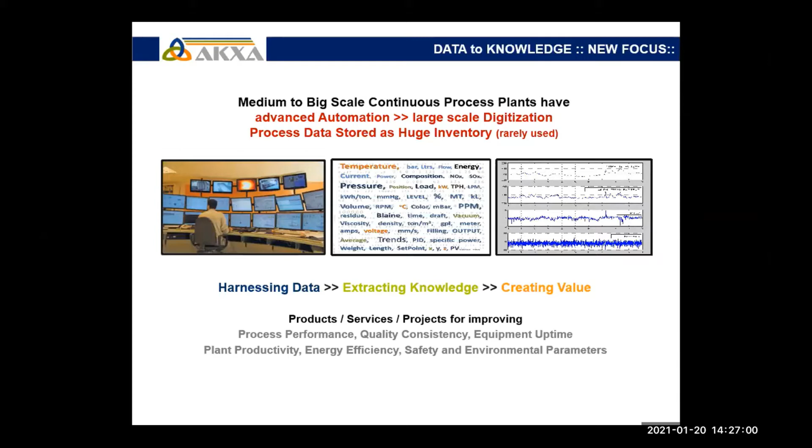We can still achieve higher productivity and energy efficiency in existing setups. That is what we are searching for, because we believe there are fluctuations and variations in every plant and every operation, because the plant doesn't stay exactly at the point where you want, right?

So you have productivities or plant key performance indicators. One day you achieve, let's say, 98% of the target, one day you achieve 95, one day you achieve 100. From a production angle, the productivity is varying - that means the same setup can give you more sometimes, and sometimes it gives you less. It consumes more specific power or heat, or it consumes less specific power. So there are variations in existing equipment on a day-to-day basis, maybe. So what is contributing to these variations? Can we pinpoint those?

Is where we come into picture. So if there are large variations, you get less margin for improvement. So we help you to identify the root causes of these higher fluctuations, and ultimately help you to reduce this, build the solution to reduce this as well.

So we are not just the observers at the plant. We will identify the gaps. We will help and sit with your team to optimize this as part of the service. And to sustain this at a lower level, we have products which can monitor online all these variations. And whenever there are deviations, we can pinpoint where is the root cause.

So ultimately, our focus or value addition proposal is in understanding fluctuations as energy efficiency limiting factors. And if we reduce these fluctuations, we can reduce the variance, ultimately optimize the plant day averages in the setup. So is it worth it?

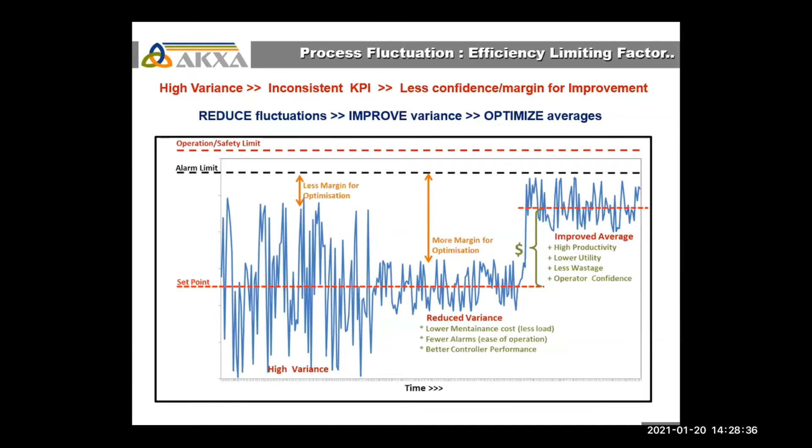When we did a small checkup, and when we were working with bigger plants, we were observing that in a stabilized plant, in a well-commissioned plant, after the OEM leaves, there are a lot of changes which happen in your process. Raw material quality shifts. You are buying from different sources. Nowadays, you are forced to use additives from different other industrial wastes. So you don't have control over them.

So they introduce a lot of fluctuations, and your process starts shifting from the best normal solutions, or you are running the plant at higher capacities than the design, 10% more already. Capacities have been hit, but the efficiencies are also getting affected during that time. So is it worth understanding the contribution of these kind of fluctuations? Are they really affecting, and is it worth chasing them and solving them so that we can save something out of the existing plant? And we saw very interesting numbers.

In many plants, we have calciners or furnaces or heat related equipment where fuel is being fired, and typically monitor the temperature, which is basically used to control the fuel or the excess oxygen at the exit. If the temperature is varying 1%, we are talking about variation, not in terms of whether the temperature set point is correct or wrong. That is your expertise. You will keep the set point, what is required. But whether it is maintained around what is required is what we are checking. There could be a lot of reasons for that.

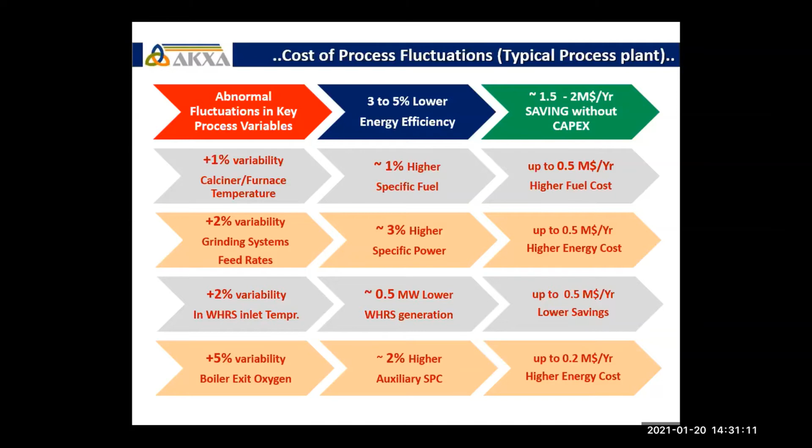We have developed various means and ways and products which can automatically take your plant data, analyze it, and give you insights. Where are these coming from? So we have introduced a thing called fluctuation audit. So like your safety audit, energy audit, environmental audit, and financial audit, you can conduct a fluctuation audit of your plant, typically a 3 to 4 day activity. We come out with gaps at all these layers.

How your plant KPIs are varying, 5 to 10 variables. Typically, you want to see day-to-day variations. And you generally monitor this. You know this is the final impact. But what is causing that is what we will study. So we go a layer down. We collect minute scale data from your parameters, lab data, other things, generally 25 to 100 variables.

And we go one more layer down from your control systems automation area. Every second, data is collected for 24 hours of around 100 to 500 variables, depending on the plant and section. And then another layer below, we go to the panels and we record the performance of weigh feeders, fans, VFD drives, which is a very fast-changing system in the field, because we believe the variations happening at that scale are ultimately impacting your performance on the top scale.

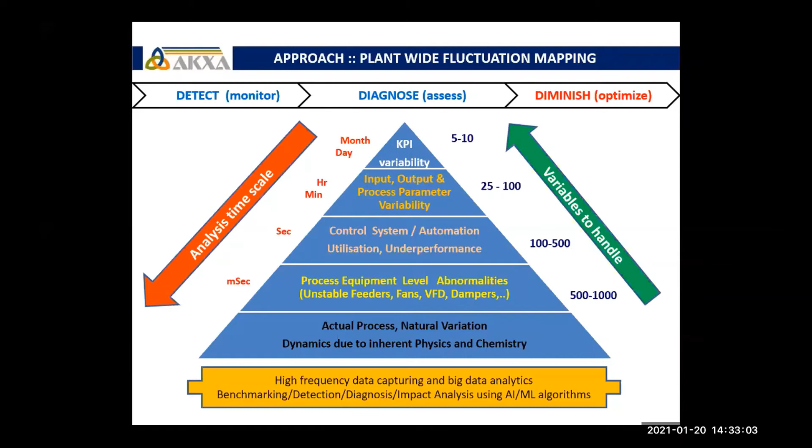So this is a unique approach we have taken, and it's not easy to do it manually. So we have used high-end data analytics algorithms in our software, and it can handle thousands of variables at different time scales in different sections. And on top of that, we have built in the process knowledge with our expertise in different fields. So this is how we take high-frequency data as our input. We detect the abnormality, we give you root causes of these fluctuations, and also help you to diminish or optimize the fluctuations in the plant.

So we have a series of products in this entire offering. In many plants, we have seen data capturing itself is a problem. Many places do not have a good, full-fledged DCS. So we have built two different tools called Akxa graphIT. OPC is a common tool available in the market, but our unique offerings are data capturing offerings, which is graphIT, which can just take the image trend. If you cannot export the data to Excel, you can take a picture of the graph and it will convert it to an Excel file using a digitization algorithm built inside.

We have some techniques for many of your plants. There are bagging plants or packing plants where in 8 or 9 seconds you are filling a bag, but there is a lot of variation in the bag weights. Typically, we have seen this in cement plants and fertilizer plants, where granules or powder are filled in 50 kg bags. Typically 200 to 400 grams is the variation coming in that. And if we can save even 10 grams, 30 grams out of this, in the long run it saves millions. In such cases, data capturing is very difficult.

So we have built a device called digitEYES, which is a mountable video camera which records the bag filling cycles, 10 to 15 bags, and it's a high-resolution camera. It can convert it to a trend and then helps us analyze where the situation is coming from, whether it's fast filling or slow filling. So we have these kinds of tools, which can be used without connecting to your existing setups. Maybe you have legacy systems, old systems you don't want to touch, or the OEM has not given you an upgraded version, so you don't want to install any software. So this video tool helps you.

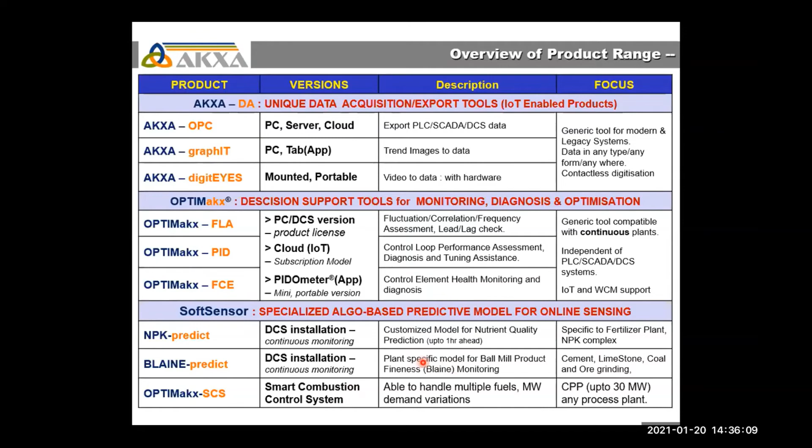So we do a thorough assessment in the plant, right from benchmarking, diagnosis, analysis, and assessment, and provide services to sustain the solutions for 6 months, 1 year, whatever is mutually beneficial for both parties. So this is the approach we take. It's a complete offering. We also just do diagnosis. We just do audits also to give you benchmarks. If you can resolve all the issues, good. If you want us to optimize, we provide the solutions around that.

We have subscription tools which can be used. You need not buy the software tools directly. You can use the subscription. If you like it, then shift over to the perpetual license. So we have all the options of business models, whichever is suitable to your plants. We can work around that and give you the best solutions.

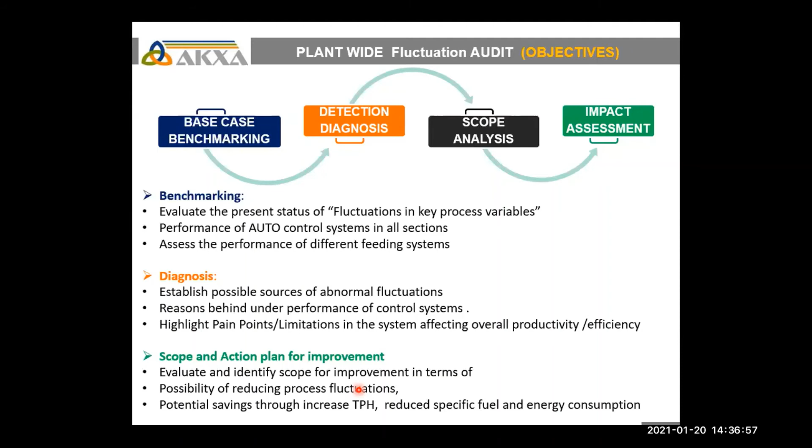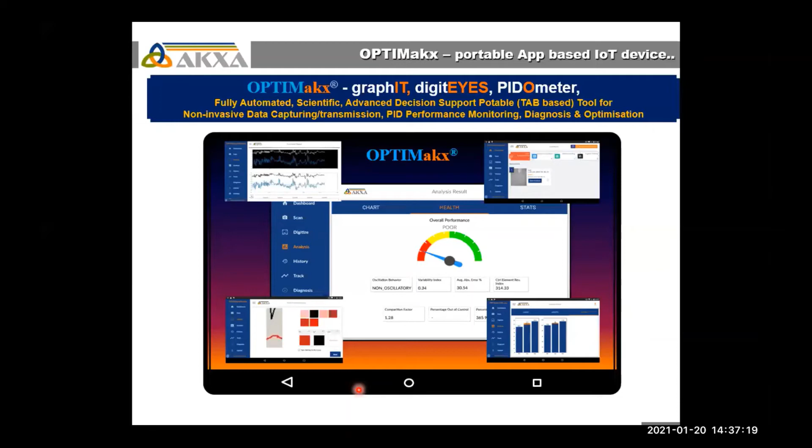Our strengths are, we would like to say, we have multiple process expertise. We come from a chemical engineering background, so we see the problems as a process engineer rather than just as an instrumentation engineer or an electrical engineer would see it, because the problems are there in different ways.

We are independent of equipment suppliers. We have worked on multiple equipments in process plants and utilities. We have worked on different capacities. We have worked with the DCS systems of all the famous OEMs you can name. We can take data out of any of these. We can write logic in any of these DCS systems. So that is our strength.

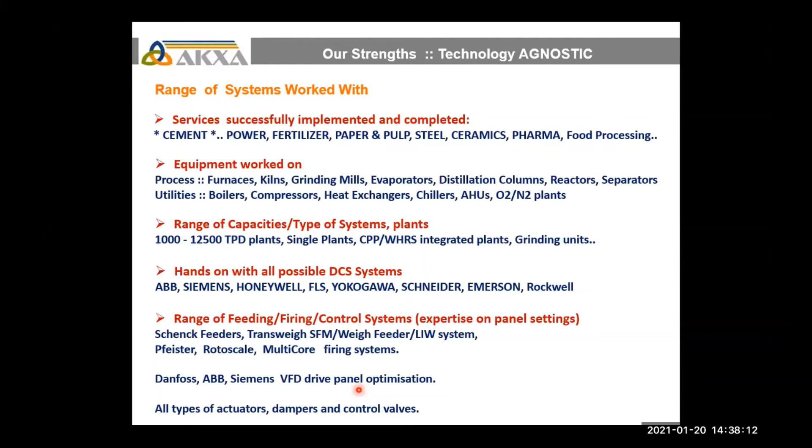We bring complete solutions. Nowadays, people are putting different systems from different OEMs, but when they integrate, there are a lot of interaction issues. So this is where we pitch in. We have one-stop products and solutions for many of your typical problems in process plants, and all this without necessarily having to put capex, purely from existing resources, what can be done.

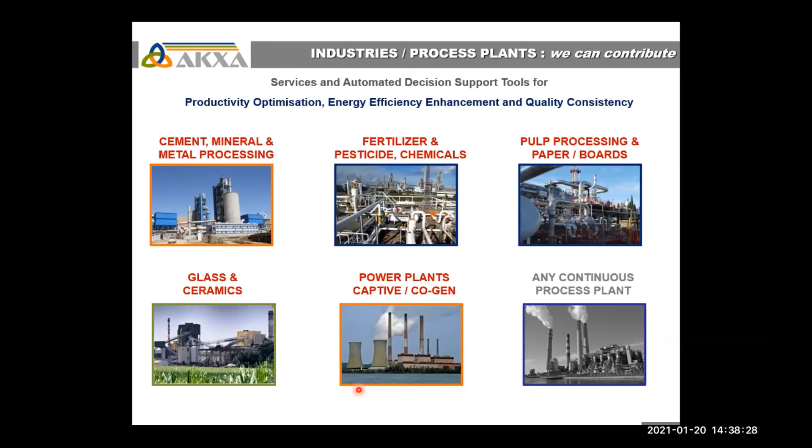We have worked in these industries, namely, as I mentioned, cement, fertilizer, paper and pulp, glass, ceramic, power, and other plants. In the last 3 years, around 60 plus clients in India and clients abroad in Europe, US, Africa, as well as in South America and East Asia. Also, we are now exploring options.

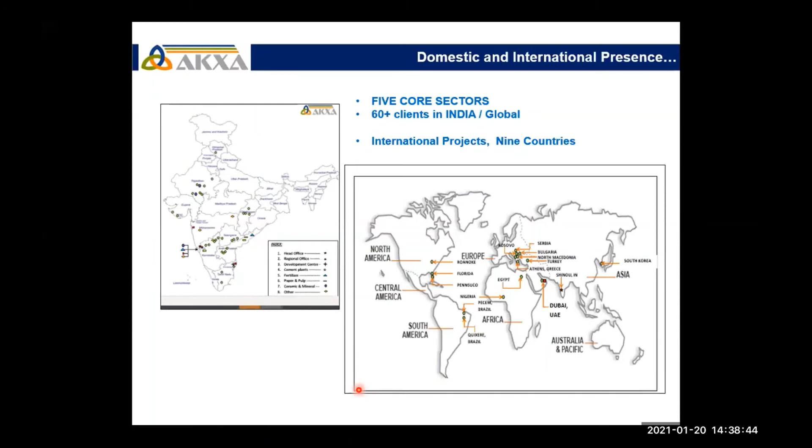So just give me the last 5 to 10 minutes to quickly tell you where we have contributed. If anyone wants details, we can share individual case studies. We have worked in different areas of different plants. If you group them by sector, or equipment wise, we have worked in water treatment plants to control ozone and pH variation in a pharma plant, which has led to savings of reagents and other things.

We have worked in HVAC systems for improving the temperature and relative humidity variations in typical large scale setups. This can be extended to buildings and other things. Though we don't have direct experience with buildings, with HVAC systems we have pretty much experience in understanding their behavior given different disturbances in the plant.

We have worked with power plant boilers. We have worked on oxygen and nitrogen plants. We have worked on compressors. These are mainly utilities where we have worked, and all big plant process control systems where large savings or large impact is observed. Okay.

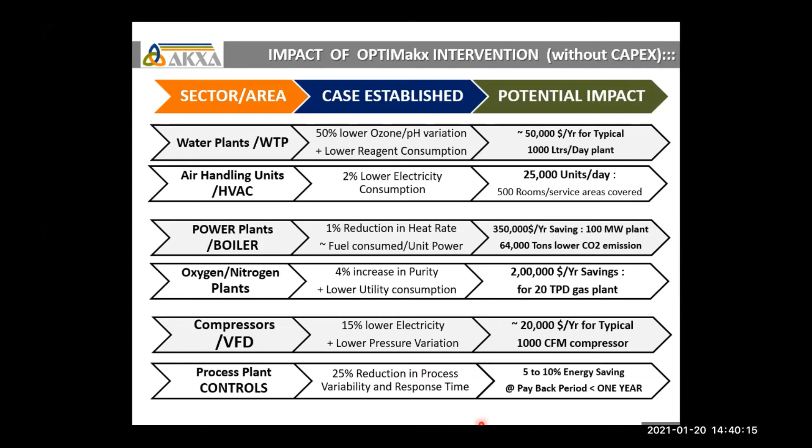We optimized the main controller firing system. Then we optimized the disturbances coming from other areas like the kiln hood pressure variation. Then we optimized the cooler, which is also supplying the air to the pyro section. Then finally we stabilized the air flows in the cooler. Ultimately, it has given lower variation in the calciner temperature, and over 6 months of observation, consistency and sustainability without having to put in new equipment, on average 1% fuel saving.

It may not appear big, but over 6 months, it's almost 6.5 tons of coal saving every regular day. And on average, it's almost 200,000 US dollars savings to this plant in 1 year, and up to 5% power saving in the pyro section, which comes to around 1200 units per day saving.

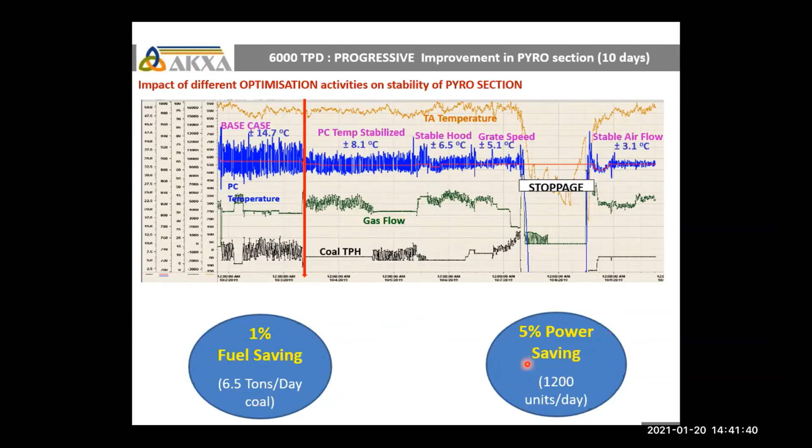Especially when alternate fuels are used. We have very interesting new logics which are implemented in the existing DCS, which can lead to consistency and stability in the operation, increase production, and increase the megawatt generation. So typically margins are available in the turbines. We can tell you, yes, we can use those margins and help you to enhance the production.

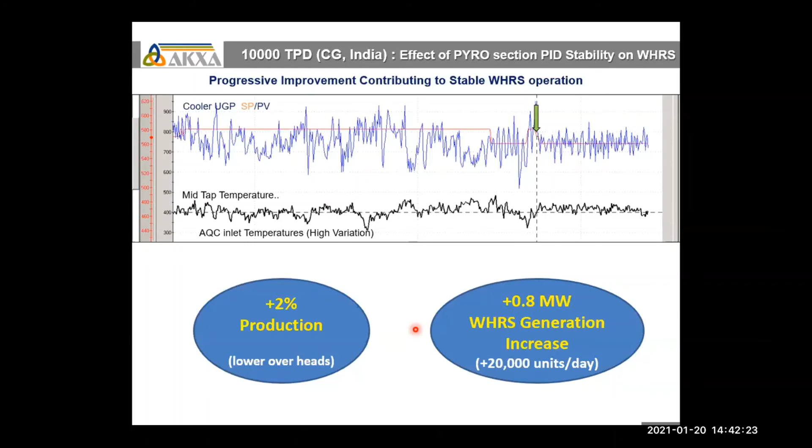This is about the quality consistency idea. In a fertilizer plant, they were facing problems in NPK variation. We worked in 2-3 areas. We found out the root cause. We gave the solutions in terms of stabilizing their sampling intervals and stabilizing their sampling methods. We also optimized the input flow. And then finally, we implemented one tool called nutrient prediction, which used to give them the feedback very quickly. Based on that, the operator would be taking action. So ultimately, 15 to 20% rejection on different variation conditions, along with excess nutrient, is reduced. Those levels are reduced.

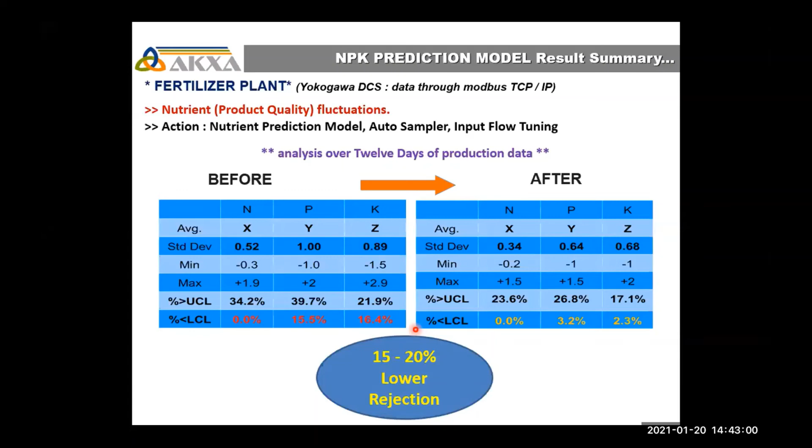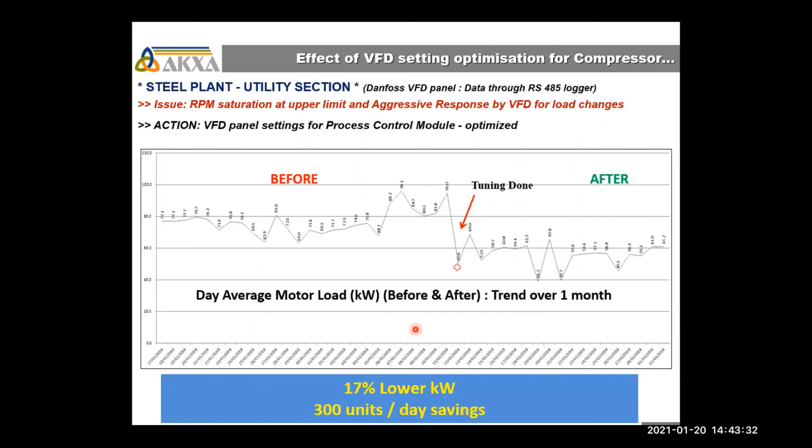We worked in a typical steel foundry. We worked on a variable speed compressor with variable load coming on it. The same VFD drive, Danfoss VFD panel settings, we optimized for the running conditions of the plant based on the shift differences and load conditions. And it led to 17% lower kilowatt and around 300 units per day saving. Typically we take the data from the model, use it and tell them what is wrong, what settings they have to change. These are pure service models. And to sustain this, we have the tools available.

This is an example from a pharma coating section where they were having issues with a delayed startup cycle. 49 minutes was taken to reach the set point where coating would start. We reduced that to 8.5 minutes by understanding what was causing this delay. And finally, 18% lower startup heat, which is indirectly steam consumption saving, and up to 9% productivity increase because we reduced the batch to batch gap. They can immediately empty and start it, especially when power trips are there. You can restart it very quickly. So productivity, which is a huge contribution in the pharma industry.

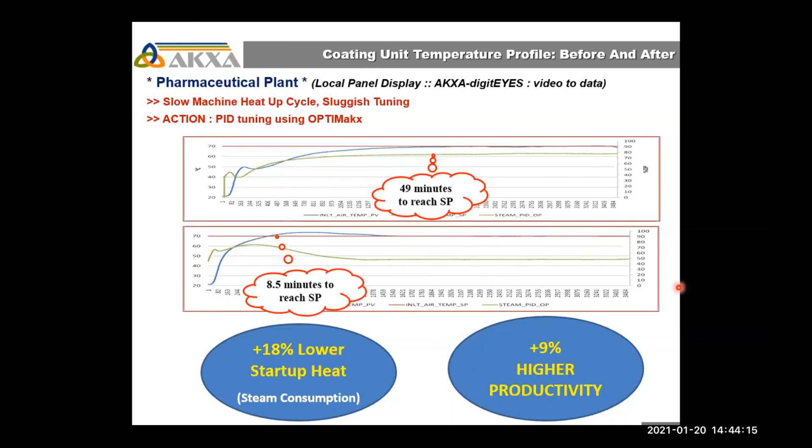This is another plant in the paper pulp industry and in the ceramic industry where oxygen plant purity was not coming. This was a 25 year old plant. The supplier stopped the services for this model. We took it up. We optimized the pressure swing adsorption ratios, pressures and valve openings. Purity was not coming up to the mark, so they were adding additional liquid oxygen from outside to make up the purity. That was additional utility usage. When we stabilized the plant, the purity improved by 3% on average, with 80% reduction in liquid oxygen, nearly 40,000 rupees per day saving, without having to install anything, just pure data analysis using our algorithms.

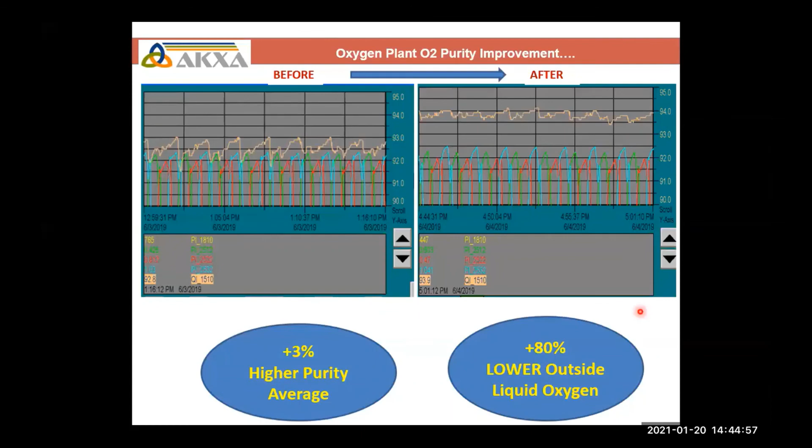Water treatment plants: pH control improvement, ozone regulation improvement. These are regulatory issues. They cannot cross certain limits. These are the bands. We brought them within the bands in the existing setup, especially ozone and pH regulations.

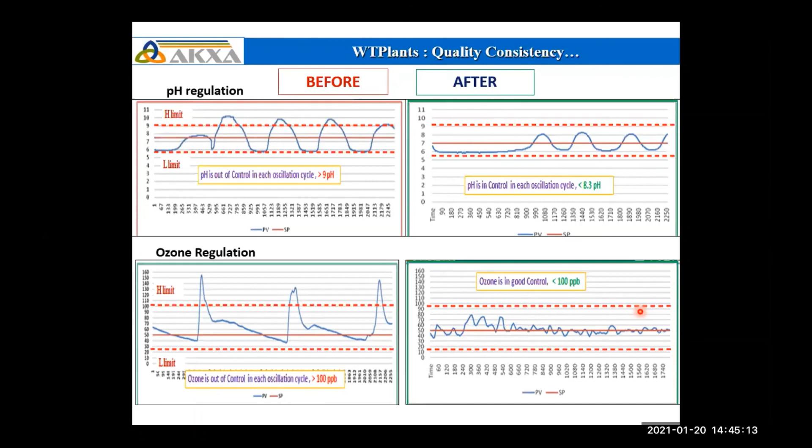Yes, that's my last slide. How do we implement this? We have a lot of options, friends, to suit your needs. We take up first level trainings as well. What is this fluctuation? How to identify it, what does it mean, whether it's affecting. Then we take audit services, one-time audits on site or even remote. If you give us access, we can do it remotely. We have done it for more than 17, 18 plants during COVID time. Everything controlled from a small place in Belgaum, Karnataka, controlling operations across plants in Europe.

Annual contracts we take for continuous improvement. Then for the software, we have subscription modes. You can take 6-month subscriptions. You don't have to install. This is there on cloud. You can log in, send the data to us, or you can directly analyze the data. You will get exclusive accounts. If you like the product, you can take it and install it centrally. The product is designed to handle multiple plants and multiple equipment simultaneously. You don't have to buy separate licenses for each plant if you are a corporate structure.

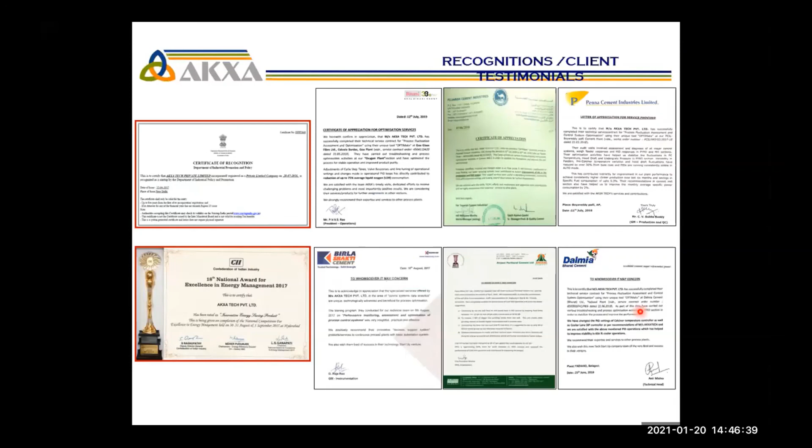We take up specific projects of Industry 4.0, not the hardware side, namely the data analysis side. If you have typical problems of fluctuations, quality not coming, variation in efficiency, variation in productivity, we can help you in many ways, friends. We have our certificates and testimonials from the last 3 years, and much more than this is recognition from CII, which we really cherish, and their support so far.